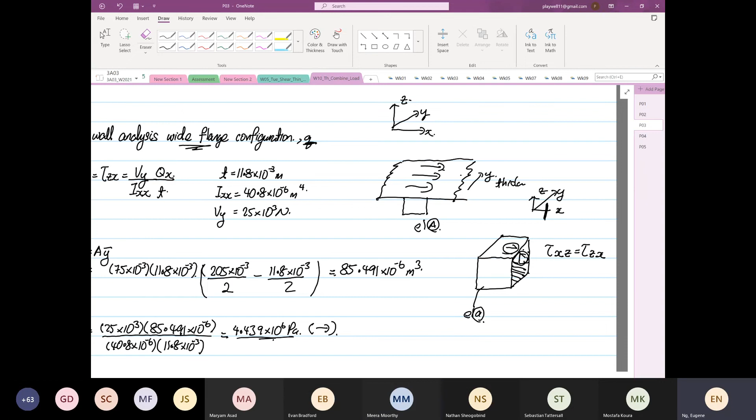Where I'm confused is, isn't the shear force in the y-axis? No, the shear force is in the x-axis. I'll tell you why. So the shear force, right? So I'll draw complete 3D again.

Oh, is it because of the shear flow? Ah! Okay, sorry, yeah, okay, now I get it. Sorry, like that. No, don't be sorry. I make the same mistake because once it's shear flow, you have to be really, really careful, right? No, you don't be sorry. Listen, I make the same mistake.

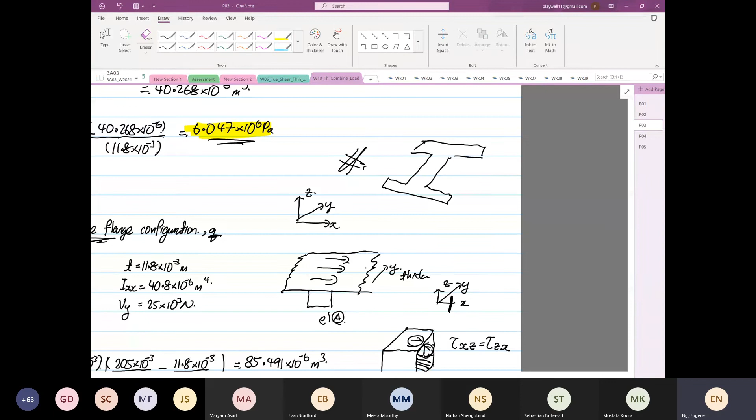Okay, so that's why we cannot just look at this force and say, okay, this will be zero, that will be zero. No, you can't say that. You have to construct your shear flow.

Okay, that was a really good question. I should have thought about that while teaching you guys too, but you asked a great question. I like that. Okay, any questions? Okay, always the few people ask, the rest are quiet. Come on.

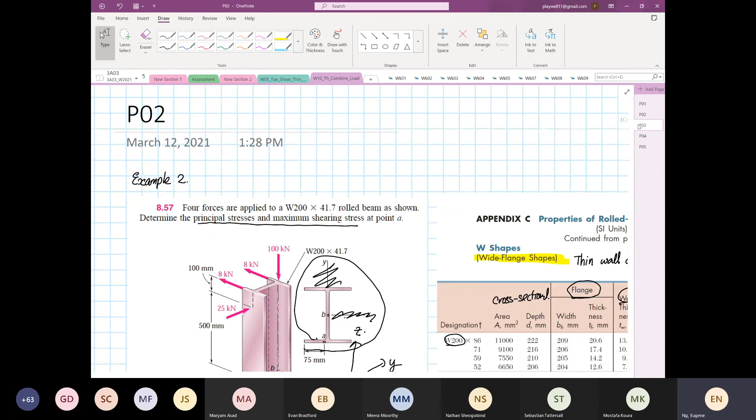But don't ask so much that I have no time to teach. Okay, so from here, right? So let's see what we have. So last week we had, okay, I'll take this, I'll copy this.

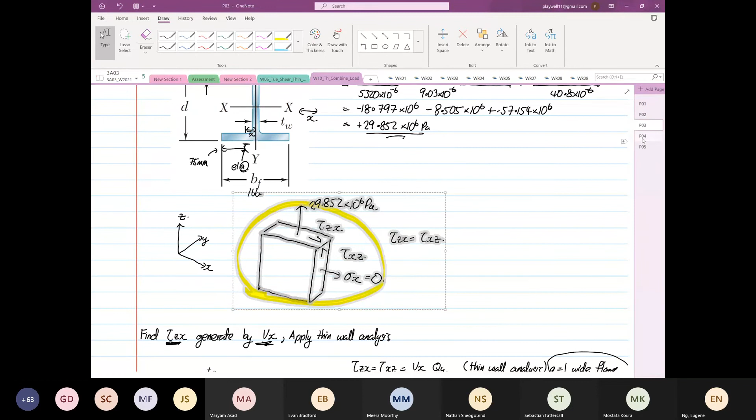Okay, last week we had this, right? So we also found, I also would like to paste this, right? I'll take this diagram. I want you to see something. And then, sorry, today is a bit messy on me.

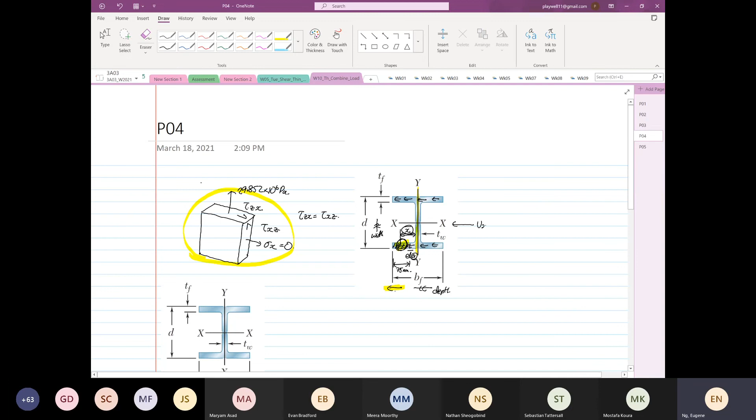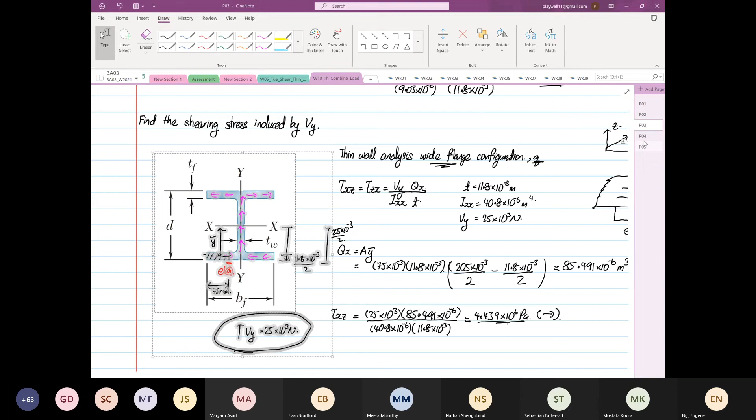So this one we are looking due to Vx. Then we construct another diagram today. So this is today. Okay, this is our Vy. So our shear...

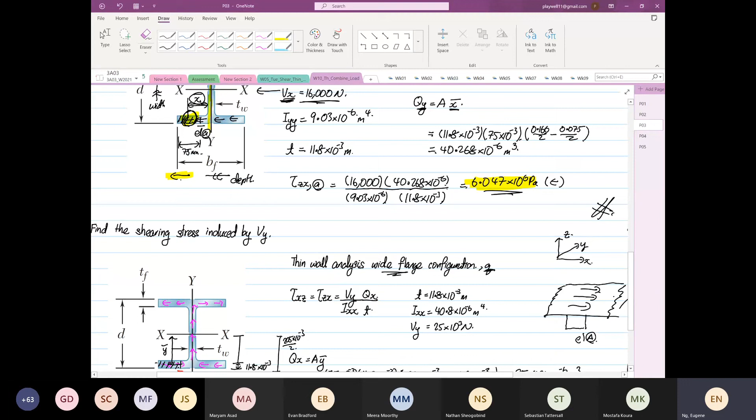xz is equal to shear zx, and we had a value of, I do apologize for flipping here and there, okay, 6.047, and I do apologize, it's best to put your direction. Okay, going this way, so 6.047, right? 6.047 times 10 to the power 6 Pascal, and it's going this way, right?

The other one is equal, the one we just calculated, is equal to 4.439.

So we have two of them acting in opposite directions, right? I did not know which direction this was going initially. I have not a clue. I'm telling you this now, I have not a clue. That is an assumption that I made, that it's going to flow in that direction. I just make that assumption, okay?

So now to superimpose what is going on, right? If you look at the direction over here, the direction due to Vx, this direction, the shear is going in this direction. And this direction is 6.047

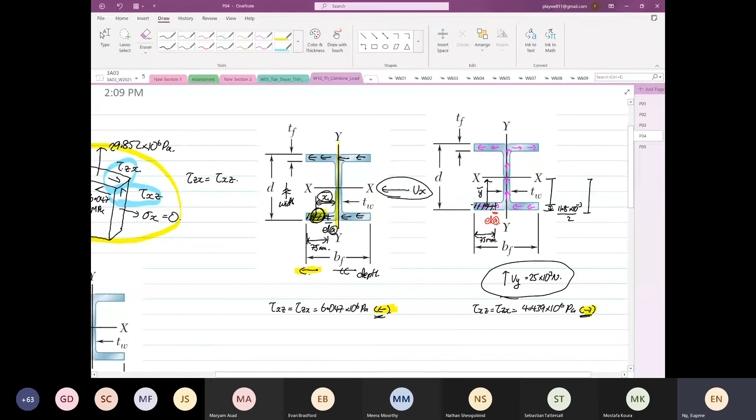megapascal. And then the other one, it got opposite, right? The other one that we did, the shear is 4.439. So I write down this is due to Vx. This is due to Vy.

So if you add up both of them together, the direction now goes opposite, because the Vx value is 6.047 and the Vy is only 4.439.

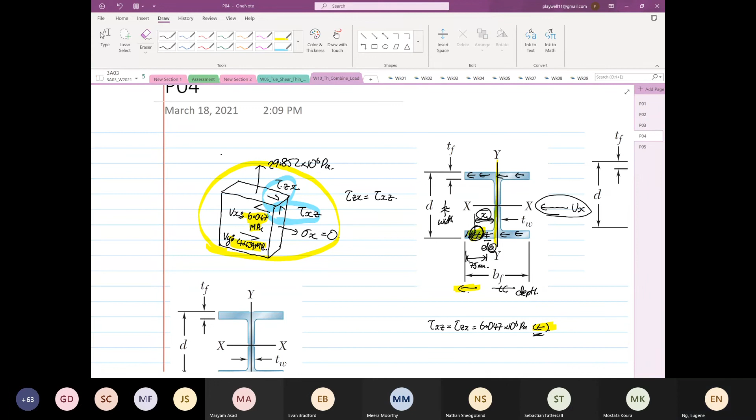So what I'm trying to say, we got it wrong. I repeat again, we got it wrong. The direction is wrong, the direction of the shear is wrong. So the right value or the right direction goes like this. So it's just simple addition, we are just doing simple addition.

So we know that we have a force going that way. So this is 29.852 times 10 to the power 6. And then this is the correct shear direction, right?

So this is equal to, the shear xz is equal to shear zx. This will be equal to 6.047 minus 4.439. So this will be equal to 6.047 minus 4.439, this is equal to 1.608 times 10 to the power 6 Pascal.

Okay, you understand, right? Makes sense, yes or no? Right? Okay, so this is what I mean. I have a question. Yes.

So how did you know they were either going right or left, based on Vx or Vy? Say it again - like, you know how you got 6 megapascals and 4 megapascals? How did you know which one was going right and which one was going left?

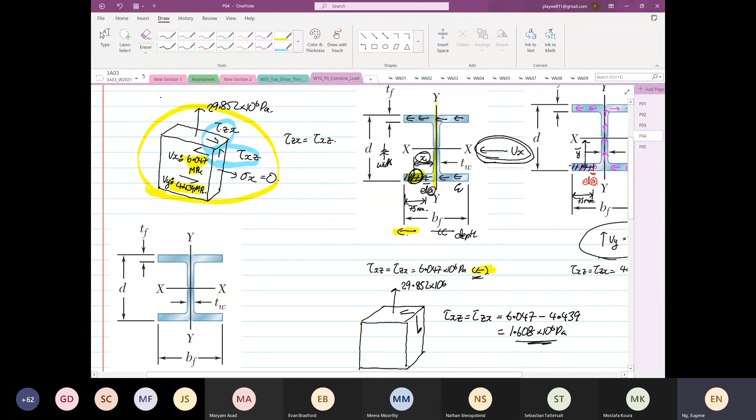So this force Vx is going this way, right? So the shear flow will go this way, yes or no? Yeah, so that's one direction. And the other one, the Vy, the shear flow is from the bottom, and this is how you construct your shear flow, yes? Oh, okay, okay, right? Yeah.

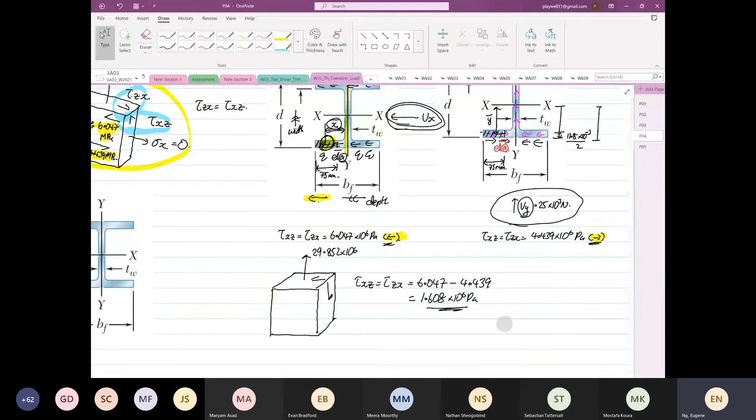Hey Maryam, I know you're really good in shear flow. What happened? I drew the arrows wrong. Oh okay, okay, I thought it was due to Dr. Cotton. He confused you guys already because he did not do the second law of thermodynamics, right? I'm just kidding. Oh no. Thermodynamics don't have fluid flow yet, it's fluid dynamics, right? When are you guys going to do fluid dynamics? Next year. Yeah, you'll be fine after you learn from this, okay?

Okay, so that's how we get the direction. So from here, we know that the correct direction is this way now.

Can I clarify something quickly? Yes. So for the tau xz and tau zx, you define the x and the z based on purely the shear flow, correct? No, the shear - yes, sorry, you're right. So you get the x and the z from the direction and the intersecting plane of Q. Wait, there's a lot of words in there. So like if you have tau xz, you get the x and the z based on Q, in which direction it's going and which plane it's intersecting, correct? Yes, yes. Okay, thank you.

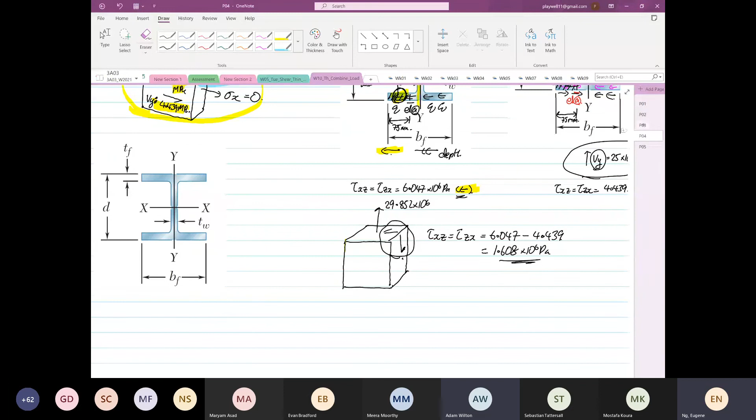Like what I mentioned before when Meera was asking, right? I used this rule. And I think I explained this last week, and those of you that have taken 3C03 with me last term, I also been through this, right? So if you're not clear, I think last week we talked about this also, okay?

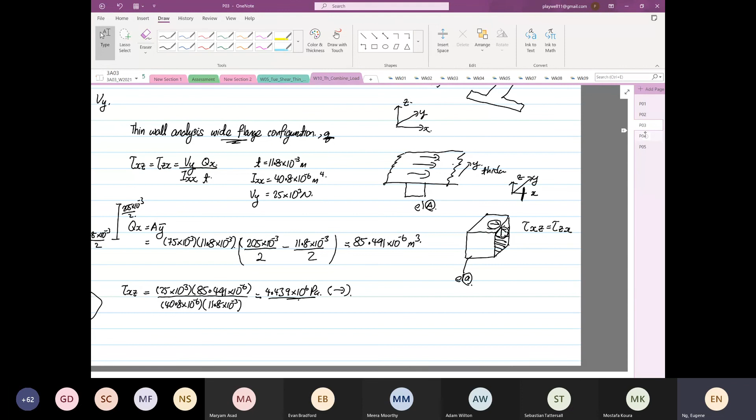But I clarify again, okay? Right. Thank you. Most welcome.

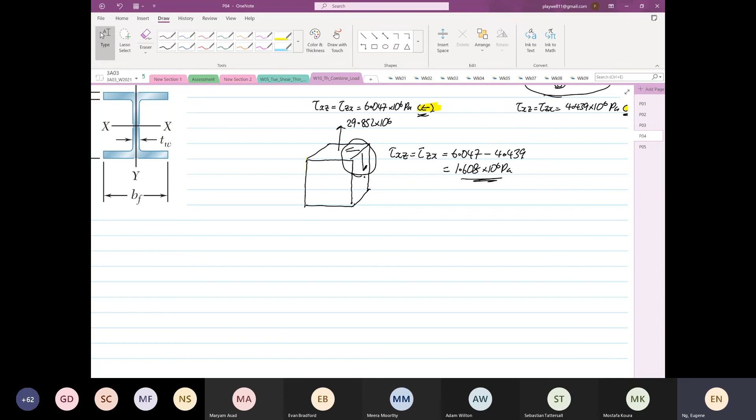So in your term test, I just want you all to do up to this. I don't want you all to solve it yet, because for you guys to be able to solve it, I need another like 3 hours of lecture. I understand that tomorrow I have 2 hours, but I feel it's not fair that all of a sudden I throw another monkey wrench into your problem, and I don't do that to you.

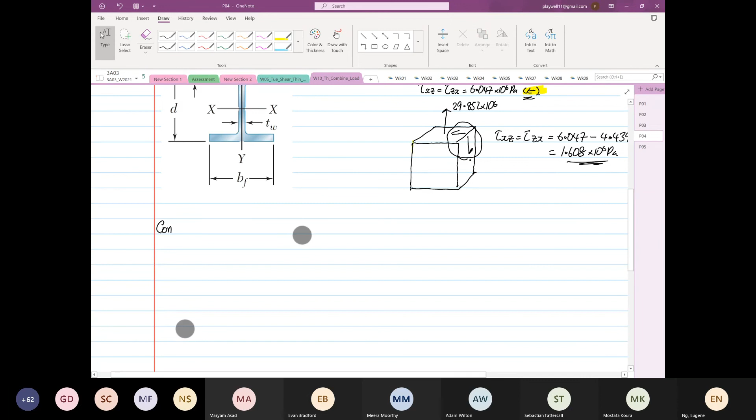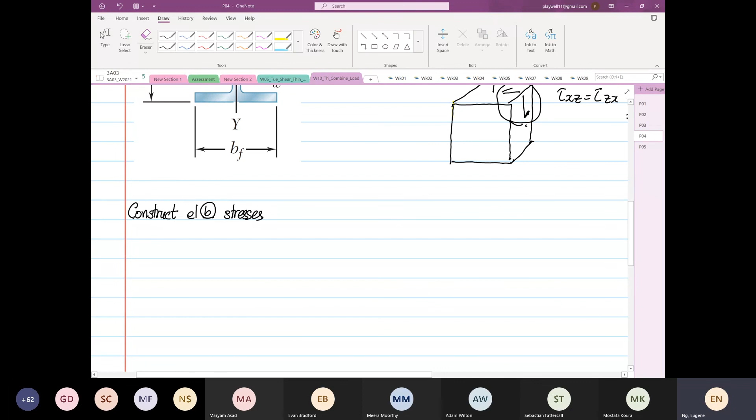So the next thing we're going to do is look into element B. We're going to find element B, and construct the stresses. Where element B is, if you refer to your lecture last week, I'm going to cut and paste again, copy.

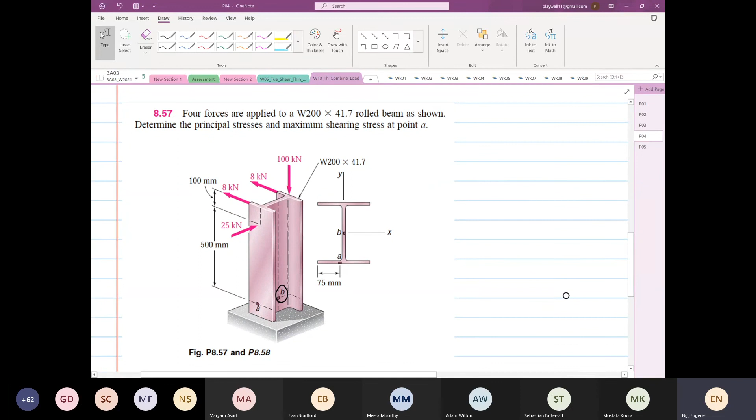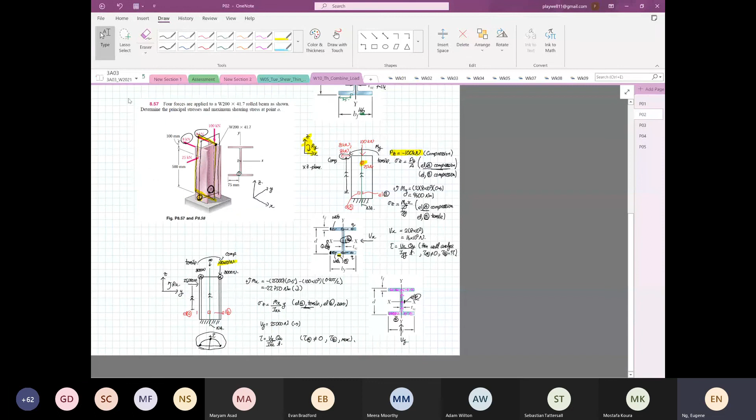So now we are going to see what is going on at our element B. The stresses that we have analyzed from here are still valid, the stresses will be the same. I'll try to copy this whole thing because if I don't, I go back and forth, and I'll go bananas. Some of you are there already.

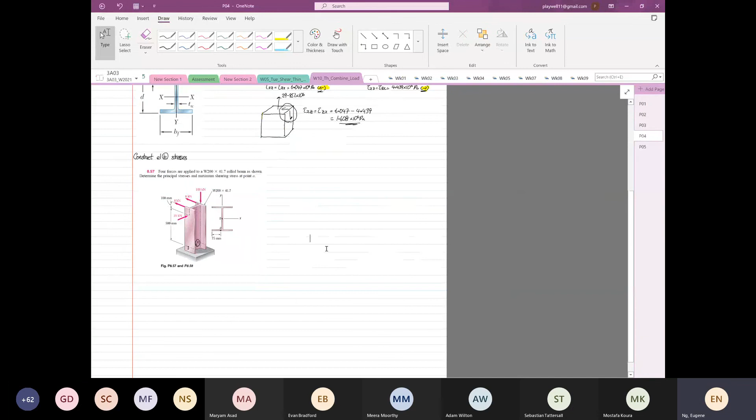Okay, so I'm going to hope this works. Oh shit. Sorry, it's not you. It's not you, okay, it's the user, it's me. Software is fantastic, but it also has a lot of bad points. I've done this before, but it crashed so often.

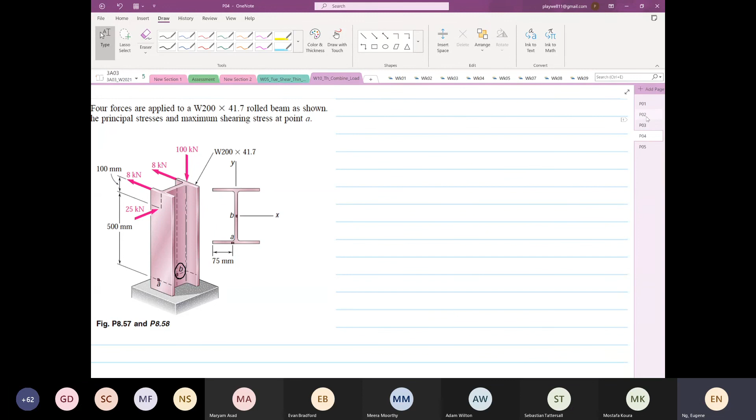Okay, element B is over there. So if we look at what we had last week, for element B, let's look at the normal stresses first.

So we know at element B, you're going to have a Pz, the axial load of minus 100. So I'm going to write down, we have a Pz of minus 100 times 10 to the power 3 Newton.

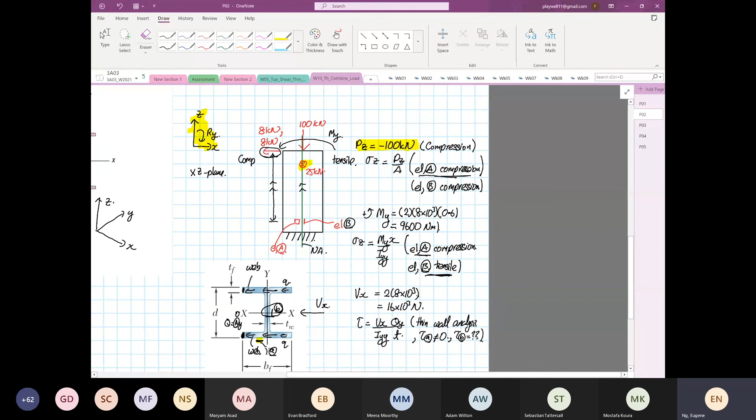Then we are going to look at our stress in My. There's a moment in Y that element B is in tensile. Moment in Y, you have 9600, so moment in Y is equal to 9600 Newton meter, and this will be in tensile. We got that last week.

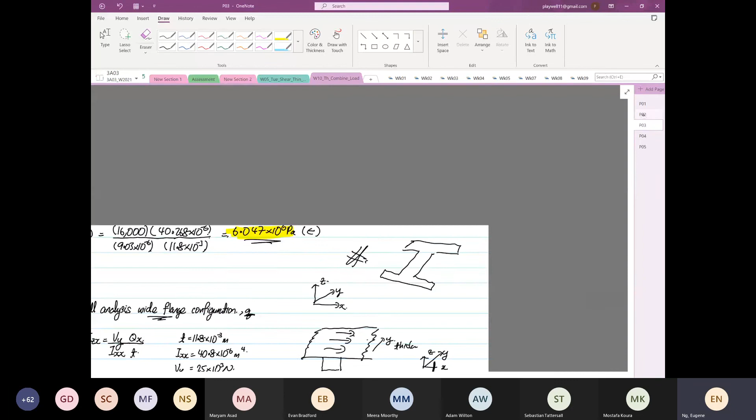Then we are going to look at Vx at element B. We don't know yet, because we have to construct the shear flow. And Vx is equal to 16 times 10 to the power 3.

And then what else do we have? Vx we don't know yet. And then we have our Mx, and stress B for Mx is equal to 0. So we know that Mx for this case will be 0 — not 0, sorry, it will induce at the neutral axis, so it'll be 0, but there's a value, minus 22750 Newton meter.

And what else? Do we have a Vy? So we have a Vy of 25,000 Newton.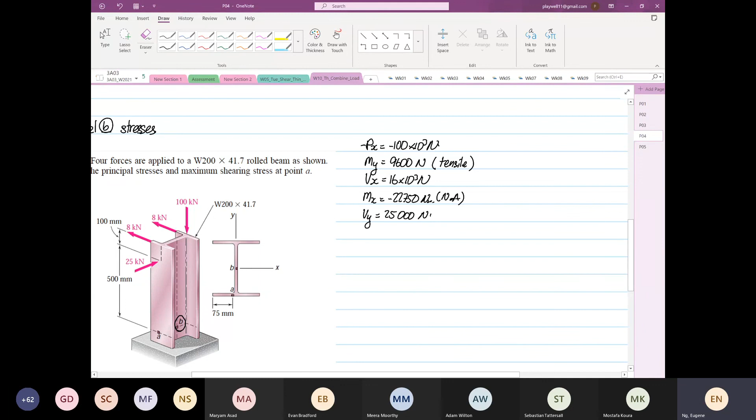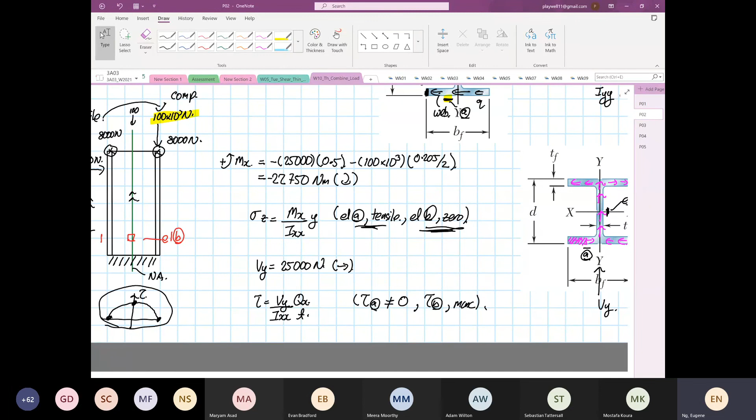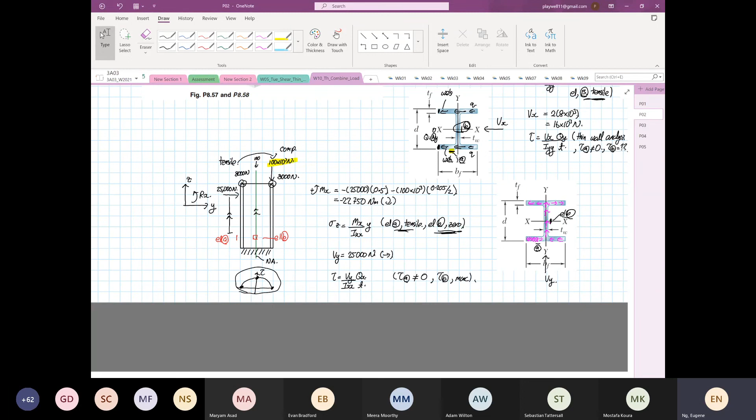Now, this is where you see that I did not look at this problem like you guys until today, but I know I don't need to analyze because we have all the information down here. If it's done properly, you have all the information down here already. That's why I want you all to have the habit of writing what element is under what sort of stress, tensile or compression. If you're not sure, say you're not sure — it's fine, because there are some things you have to look at thin wall, or you cannot assume it's thin wall. When you go thin wall analysis, you have to think.